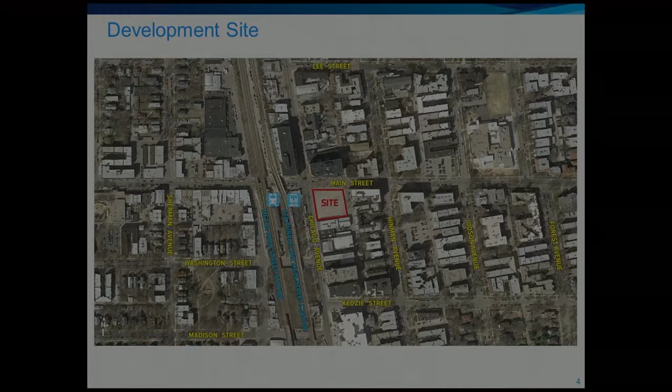Thank you. Can we stop you for a second and get a staff person to turn off the lights? Oh, great, great, thank you. This one also? It's not working up here. No. Okay. There, thank you.

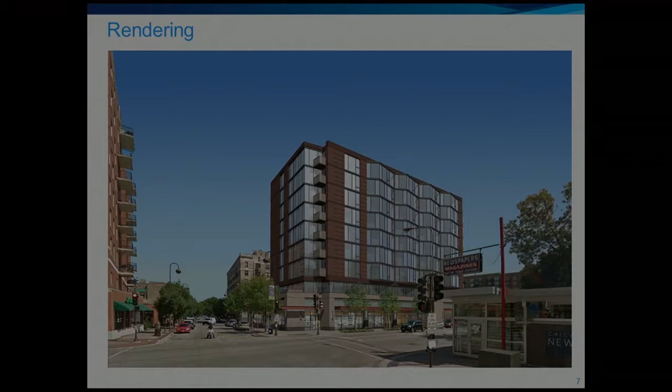Grade level will be primarily retail. The majority of our parking is below grade, one level below grade, with a number of zoning regulation spaces, as well as the opportunity to expand the parking count by way of tandem parking, as well as mechanical lift parking on the west side.

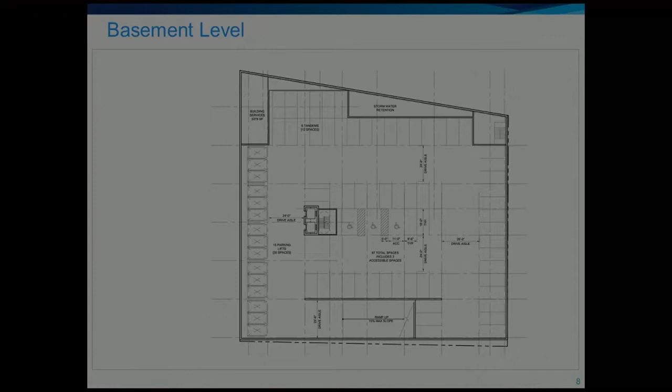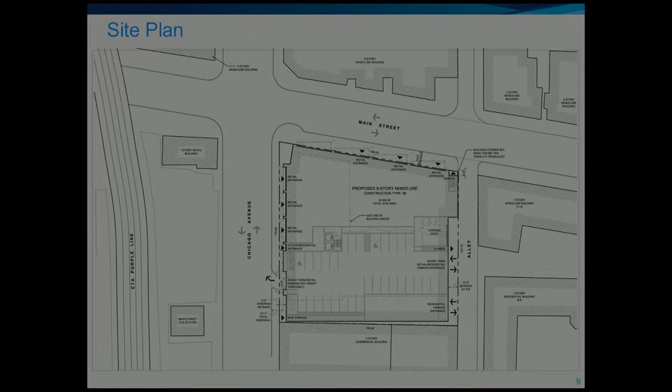This is an area and site plan which indicates that we're complying with the Chicago Avenue streetscape setback requirement, which we believe is a great thing to be complying with, because it actually widens the sidewalk in a way that allows us to provide new enhanced landscaping, as well as enhancement of the pedestrian experience along Chicago Avenue. On Main Street, the existing sidewalk is already, I believe, 14 feet wide. It's pretty considerable. We will be adding significant landscape to that side as well. We've worked very closely with city agencies on vehicular circulation on and within and around the building to minimize impact on local auto traffic, as well as local pedestrian circulation.

Grade level plan, as I said earlier, along Main Street and most of Chicago Avenue at the corner is retail lease space. Here is the entry lobby for the tenants and residents of the building. Parking on the south half is multi-use parking, which we'll explain in more detail later. Loading has 2 loading berths off of the alley.

We've worked with city agencies to minimize traffic impact by allowing only one-way, right-turn-only egress from the parking onto Chicago Avenue, as well as virtually widening the alley by setting our building back 10 feet on the alley side where vehicular circulation and loading occurs. We'll also be taking the existing overhead power and communication lines and power poles in the alley and relocating them underground at the developer's expense to provide neighborhood enhancement.

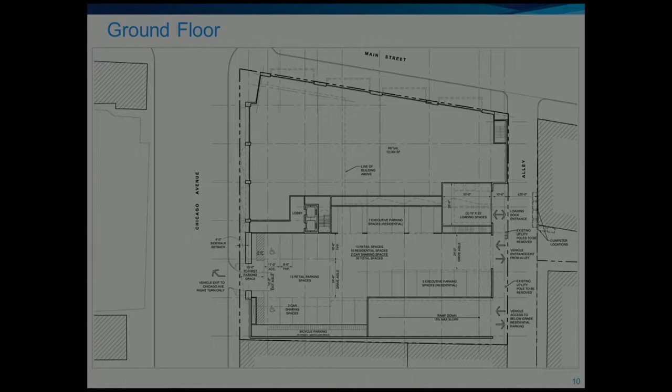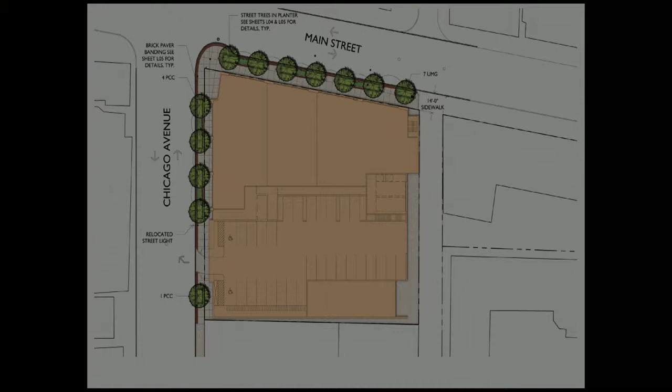The next slide indicates the level of landscaping anticipated along Chicago Avenue and Main Street. Particularly along Chicago Avenue, this is a significant enhancement on the east side relative to the existing conditions from a landscaping perspective. This elevation indicates the landscape concept with both shade trees and low perennial plantings in the planters along the sidewalk.

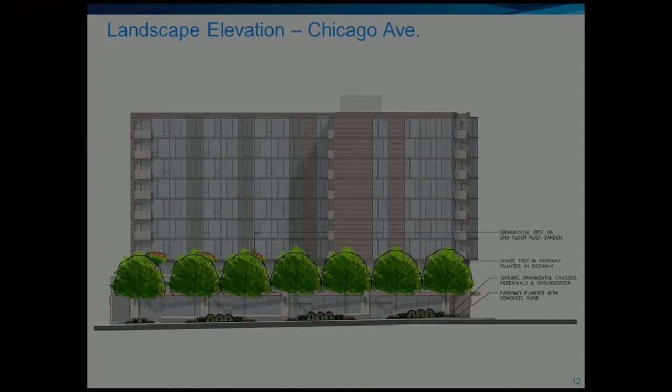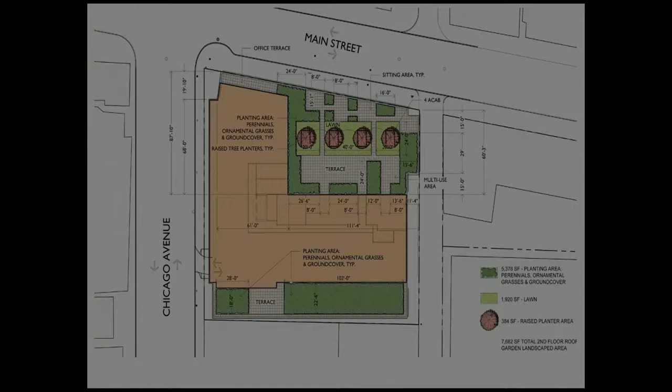This is a typical residential level, which would be levels 3 through 9. Each has 16 units with a mixture of studios, 1-bedrooms, 2-bedrooms, and 1 three-bedroom unit on each floor.

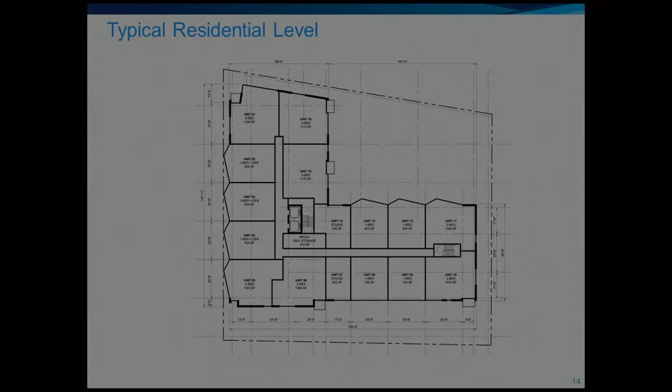East elevation, this is the elevation fronting the alley. We intend to continue the quality materials used at the retail storefronts along Chicago Avenue and Main Street along the alley, so that it doesn't have that typical back-of-house service look.

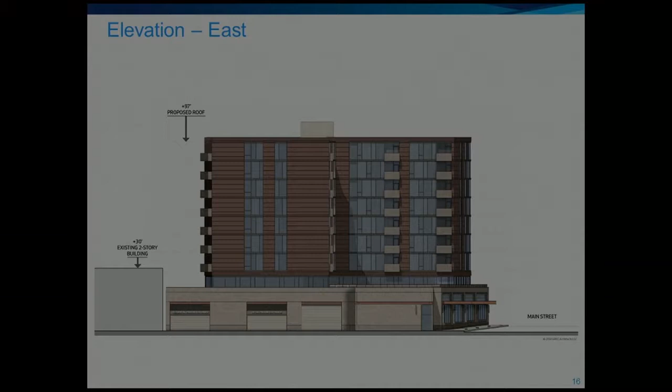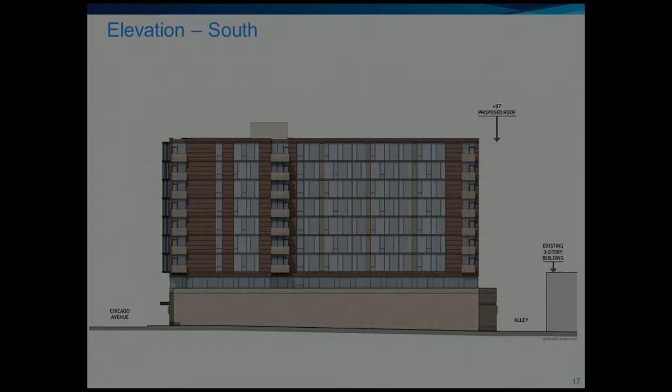The south elevation, which you actually wouldn't ever really see like this, but this portion directly abuts the existing building to the south of us. And then finally the north elevation looking at Main Street, with the intended treatment of glassy retail storefronts and canopies, and lots of lighting.

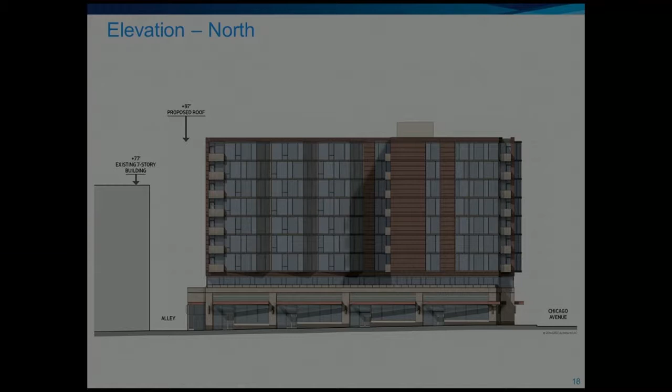Sorry? I'm sorry, I can't. Sure, of course. So this is the second level deck, which is at plus 20 feet above grade level—probably just a little bit taller than the ceiling of this room. Do you have an elevation of that, from that point of view, with the landscaping in it? Yes. Yes, we're coming up on that, in probably a slide or two.

So these are a couple of views with the building stitched into existing photographs, just to show you how we see it relating to the existing neighborhood. This view looking north on Chicago Avenue indicates that we'll be using the 4-foot Chicago Avenue streetscape setback to enhance the streetscape with a significant amount of landscape planting. And again, this is the south elevation, so it's not that imposing since you can't see it directly.

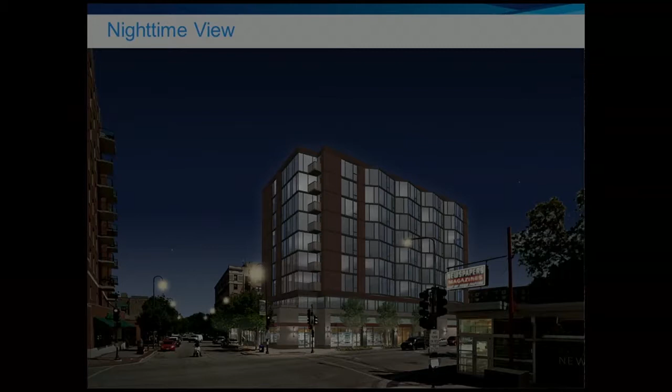This is the view I believe you're asking about, Alderman, looking west on Main Street. I'd like to reiterate that we deliberately configured the building from this perspective to set back the majority of the east-west portion fairly significantly, in order to not impose so much as a street wall on Main Street. This is also where the amenity deck will be—we're showing smallish trees now, but eventually they will be mature and more significant. Meanwhile, we're also creating enhanced landscaping at the street level on Main Street as well.

Could you detail a bit more the corner of the building at the alley? We had a couple of community meetings wherein it was suggested to us to create a bit of a setback here at the alley, at the corner of the building, to mitigate any alley vehicular traffic conflicts with pedestrians on the sidewalk on Main Street. So what we've done is set the building back 5 to 7 feet here with a glassy corner to try to enhance visibility between the alley and the portion of Main Street fronting our project.

We have a question from Alderman Fiske. Just a quick question - are the trees growing in planters? Are they concrete planters? The street trees... the trees on the amenity deck? Yes, they are in planters, probably precast planters. Usually those are 3 feet deep in order to accommodate tree balls. What kind of trees are those? I don't know if they've been specified or not, to be honest. We can get back to you on that.

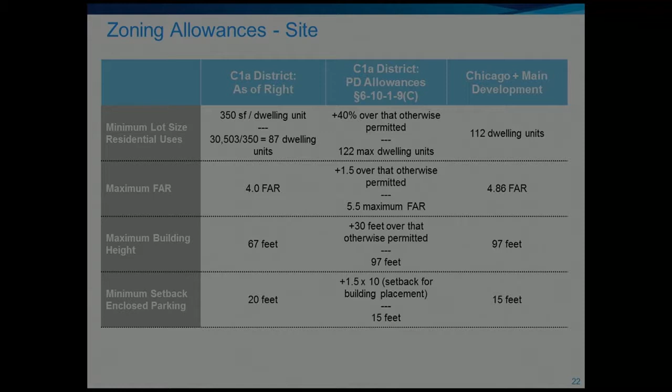The next slide summarizes the C1a planned development allowances that we're applying for. You'll see that in most cases we are not applying for the maximum allowable. We're looking for 112 dwelling units versus the allowable 122, FAR of 4.86 versus the PD allowable of 5.5. We are asking for full consideration on the maximum height allowable in the PD allowance, and we are asking for the 15-foot allowance with respect to our setback for enclosed parking. The parking will not be in any way visible from any of the local sidewalks.

Finally, the zoning required - because of the number of uses that we have in the building, regardless of the size of those uses, by the zoning ordinance we're required 5 loading berths, 10 feet by 35 feet deep. We're proposing to provide 2 loading berths, which we think would be more than enough to meet the demand, because none of our uses are actually that large, except with the possible exception of residential, which would have the least demand for loading. I'd also like to point out that in addition to these 2 loading berths, we have a dedicated berth for waste pickup, so we're not using one of these 2 berths for waste pickup.

And with respect to the depth, we're proposing to provide 25-foot deep berths within the building itself, but as you recall, we're setting back the building 10 feet from the property line along the alley. So technically we can accommodate the required 35-foot deep berth, but because of the setback, we're proposing that 25 feet of that depth is enclosed.

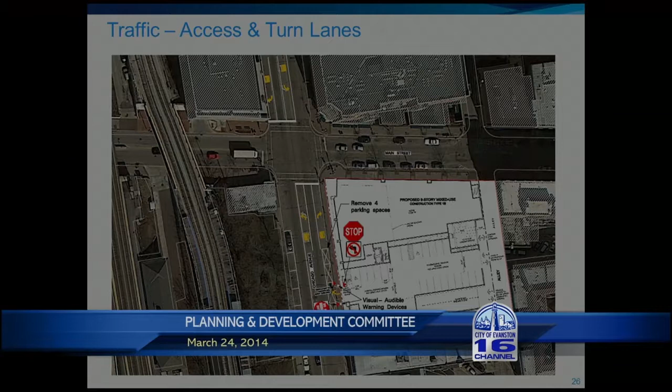Good evening, Luay Aboona, A-B-O-O-N-A. I'm a traffic engineer principal with KLOA. I'll speak briefly about the traffic study that we conducted as part of this development. We worked very closely with your engineering staff, with your traffic engineer, to develop an access plan that is workable for the project, as well as minimize the impact on the street system.

What you see here is the access that we're proposing to serve the development on Chicago Avenue. Working with city staff, we determined that a right-out only would be the best solution for this location in terms of minimizing the impact on Chicago Avenue traffic, as well as pedestrian impact, particularly given the proximity to the signal at Chicago and Main Street. So coming out onto Chicago will be right-out only under stop sign control, signed no left turns out. There'll be a sign facing Chicago Avenue, do not enter, for vehicles not to enter from Chicago. There will also be striping, and the driveway would be designed to force people to make a right-hand turn out onto the street. The rest of the access will be off the alley, both for the garage access as well as for the loading docks.

As Don indicated, the building will be set back that additional 10 feet to provide additional area for truck maneuvers as well as for vehicular maneuvers. The building at the corner will also be set back to improve the sight lines as vehicles are exiting the alley onto Main Street.

As part of our traffic study, we looked at the traffic in the area. We looked at the traffic at the intersection of Chicago and Main, Chicago and Kedzie. We also looked at the traffic on the alley, and we actually did traffic counts to see how much traffic is using the alley. I'll just briefly go over the conclusions of the traffic study.

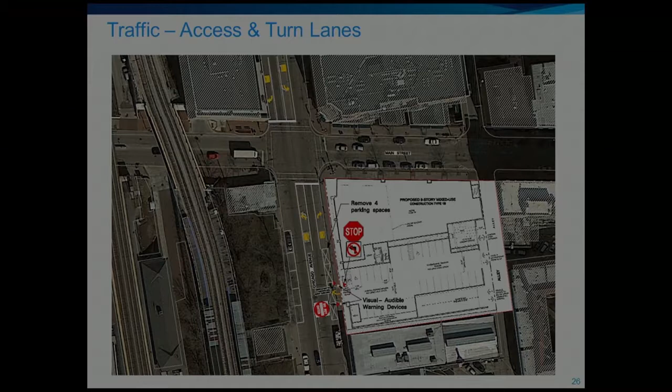One thing we're going to be doing that I did not point out on the previous aerial is that we are eliminating the 4 parking spaces along Chicago Avenue here in order to provide a northbound right turn lane, similar to what exists in the other direction. This will mirror what's happening on the north side and will improve the flow of traffic, reduce some of the queuing that occurs, and allow these people to turn right onto Main Street more efficiently.

The alley will be able to accommodate the limited amount of new traffic generated from the development, both vehicular traffic as well as truck traffic. As I said, we did counts on the alley, and the amount of traffic that uses the alley currently is not significant. In fact, it averages about 1 car every 2 minutes.

The alley access will reduce traffic on Chicago Avenue and pedestrian conflict, as I indicated earlier. The outbound traffic onto Chicago Avenue will be right turns only, again to minimize the impact on pedestrians and vehicular traffic. The removal of the 4 parking spaces will allow for that right turn lane and help the flow of traffic on Chicago.

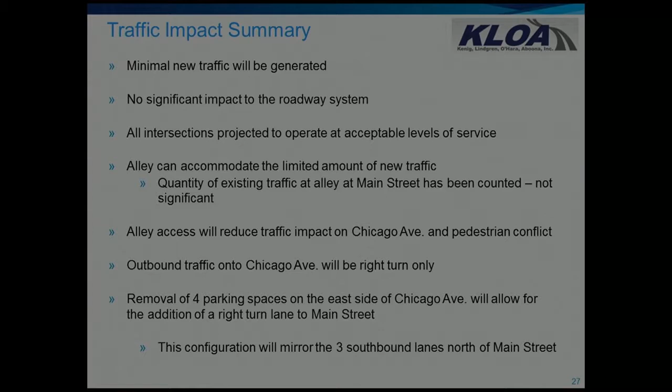Good evening, I'm Scott Bernstein. I'm president of the Center for Neighborhood Technology in Chicago, and I'm also a resident of 917 Elmwood, near Main in Evanston, a couple of blocks west of the development. We have some expertise in measuring the effectiveness of transit-oriented development, not only around the region, but around the country, and I wanted to share some of our observations about this space.

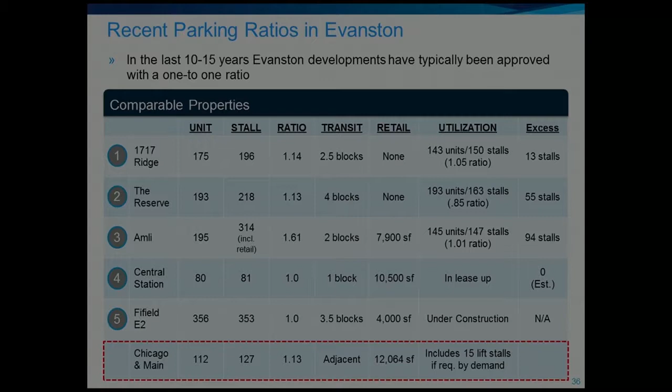And of course, this project is under construction.

As far as the physics of how this is going to work, the lower level has approximately 76 base single stalls. They will be available on a permit basis, an open parking basis. And then we'll have assigned parking in the dual spaces.

The benefit of having this open permit parking here is it will allow us to use this space as swing space for office users. We think anywhere from 15 to 25 office space parking spots will be able to offset the users of these spaces that are at work with the office users in the building. So it's a perfect co-activity: as people leave the building, it gets backfilled with office parking.

In this particular case, we have the preponderance of both the residential and all of the office addressed. On the main parking level, we have a dedicated 13 retail spaces, 2 car share spaces, and 15 additional retail/residential spaces. These will be similar to the office space, swing spaces that will be vacated during the day by people that are working.

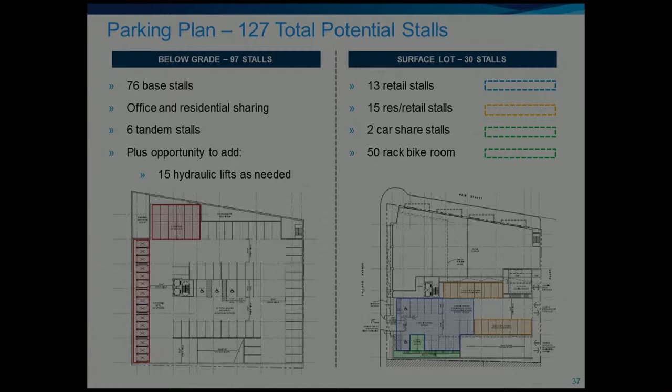It's important to note that because of the size of the property and the multiple uses, we will be able to keep a full-time staff on property 7 days a week, 365 days a year. That allows us to manage the parking in a comprehensive way. It's not a situation where there's an issue, you make a phone call, and an hour later somebody shows up. We're there all the time because we have an ongoing marketing, leasing, and management function.

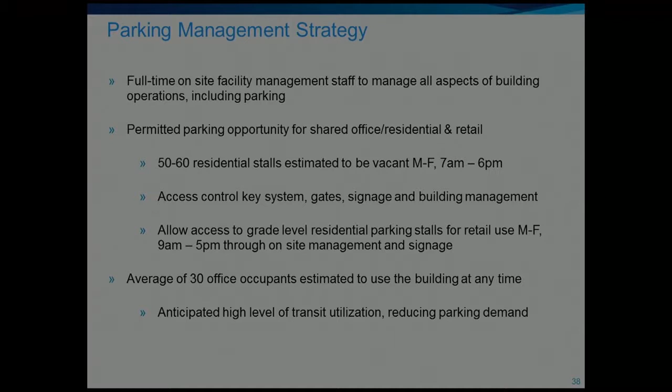I talked about the components of the office use. I also wanted to mention that we'll be using an access control key system that will allow us to control access to the lower level, and we'll have appropriate signage and other markings to indicate the retail and shared parking areas.

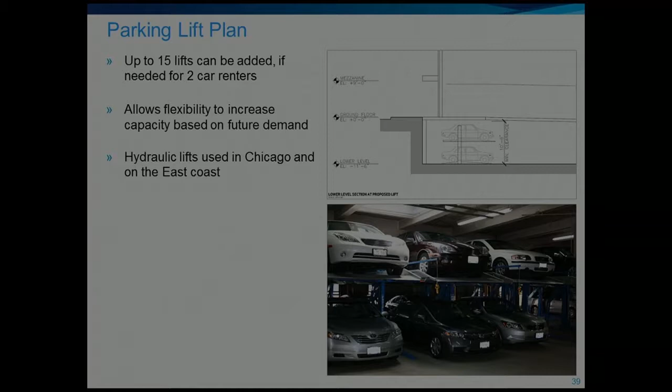We wanted to quickly mention the availability of the lift product that is going to be installed at one end of the parking garage on the lower level. We've had a lot of interest in this. It has become much more commonplace. There's actually a building in the West Loop downtown being proposed that is 100% hydraulically actuated parking on 3 different levels. So I think we're seeing a trend toward that, and we're confident and comfortable with that particular product.

I'd like to introduce Mr. O'Donnell now to provide you with some wrap-up.

I'm John O'Donnell, part of the sponsorship group. I just want to briefly summarize and restate some of the things that have been said. But first, this is really an extraordinary site and an extraordinary opportunity, and we're very pleased to have this opportunity to work with you.

Evanston itself is unique in that it's a North Shore community, but also has a pedestrian accessible feel to it and is very urban in context. So it blends both the things of a downtown neighborhood like Wrigleyville, along with the benefits of the North Shore. The transportation characteristics we spoke about, and everybody's aware of it—this is probably the best, certainly second to none in the whole metropolitan area and in the state, in terms of an opportunity to develop a transit-oriented development.

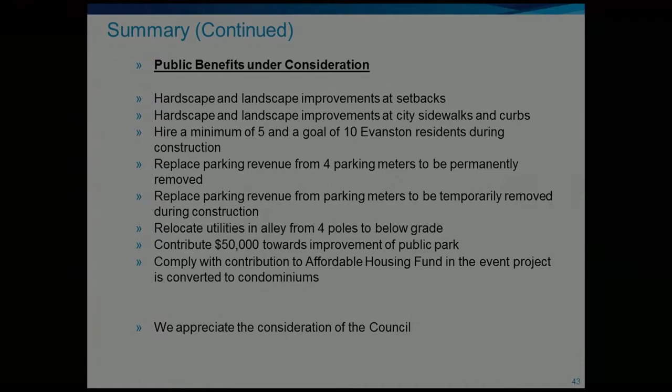Thank you very much for your kind consideration. Hopefully you'll look favorably upon this. Thank you. Thank you.

Alderman Fiske: I just had a really quick question about the parking, the retail parking. Is that going to be metered in the building? No. So how do you keep tenants from parking in the retail parking, the reserved spots?

Is the entrance where the 4 spaces on the street are being removed? Is that where the entrance to the retail parking is, or have I gotten it confused? Well, actually, it's a turn lane that's being added that's taking that space. But where those 4 parking spaces currently exist, is that where the entrance to the retail parking is going to be? It's not. Okay, then I've got it flipped. I can back up if you want me to. No, I think I've got it.

So it's primarily through signage and through monitoring. We will have signage with a maximum retail parking time, be it 30 minutes or 60 minutes. And how is that going to be enforced? Well, typically we'll have staff there that can monitor it. You can mark tires with chalk, and you can put notes on cars.

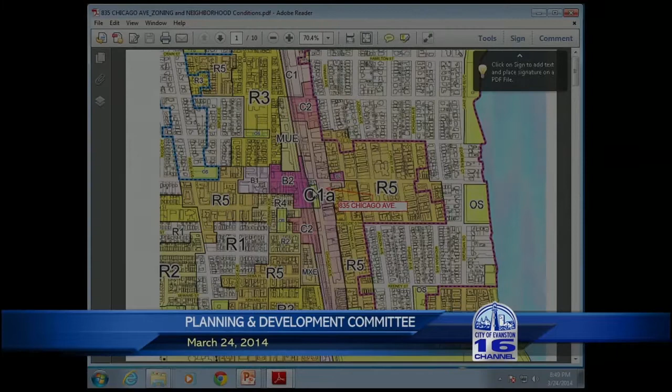835 Chicago Avenue is located in C1A zoning. As far as I know, that area is the only area with the C1A zoning code. Like the other areas, there's no C1A elsewhere. It's along Chicago Avenue from Lee Street down to South Boulevard.

One of the parking experts mentioned a quarter mile as a TOD area. So I measured a quarter mile circle from the Purple Line station. It includes 900 Chicago Avenue, 515 Main Street, also 835 Chicago, also ALMI south of Kedzie Street. And as you see, Main Street is only 21 feet wide. If you exclude the street parking, it's a very narrow street, really a one-lane street. And the alley is only 20 feet.

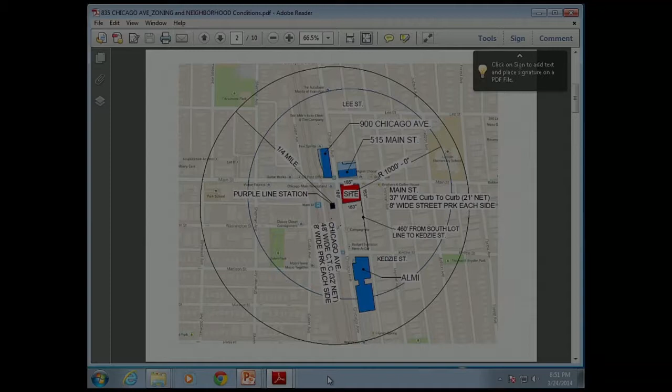There's a 7-story building at 900 Chicago Avenue, which was completed in 2005, and 515 Main Street, which is a 9-story building, but it's also 97 feet high to the bottom of the top floor ceiling. So actually, it's not 105; it's 97 feet. I want to correct that. I measured it myself.

And this is the ALMI south of Kedzie. It's completed in 2013. It has an 18-foot wide sidewalk along Chicago Avenue. Also, it has an open space building plaza on the corner, approximately 3,500 square feet.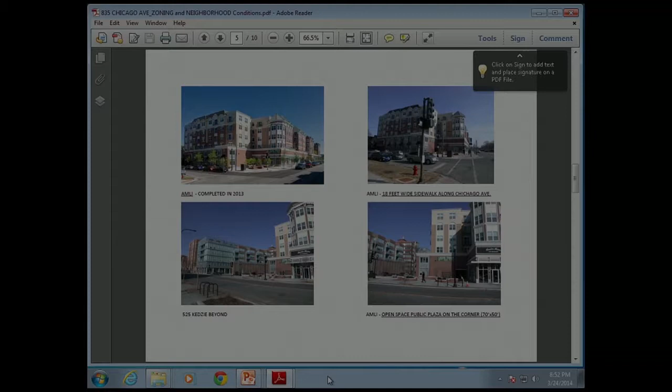I did a zoning analysis for the project. This is a C1A plan development, so the maximum allowed is 87 units, but they are asking for 112 units. That's 29% over what C1A zoning allows, but that's within the PD allowable.

Also, FAR is the gross inhabitable area divided by lot area, and the maximum C1A requirement is 4.0. They're asking for a little bit more than 4.8, and they're asking for a height of 97 feet, which is the maximum allowable in PD. They are increasing by 30 feet.